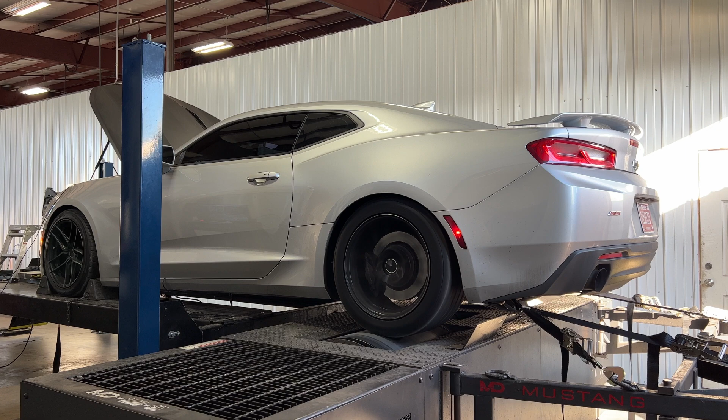So today's video, we're gonna be working on this 2017 Chevrolet Camaro. This one is an LT1 automatic car. This car was just purchased by the owner with everything unknown. So let's go ahead and get it inside and see if we can figure out what all's done to this car.

All right, so let's go ahead and get this hood popped. So just like the other day, we have no idea what's done to this thing. This car was purchased exactly as it sits, and the customer just has some drivability issues. Primarily, they said that it feels like it's loading up at idle.

So we got JLT cold air, MSD intake, KTEC 103 throttle body, got a set of long tube headers. The car's camshaft is unknown. So let's go ahead and pull the file out of it and take a look at it, and then we'll start this thing up and data log it on its current file.

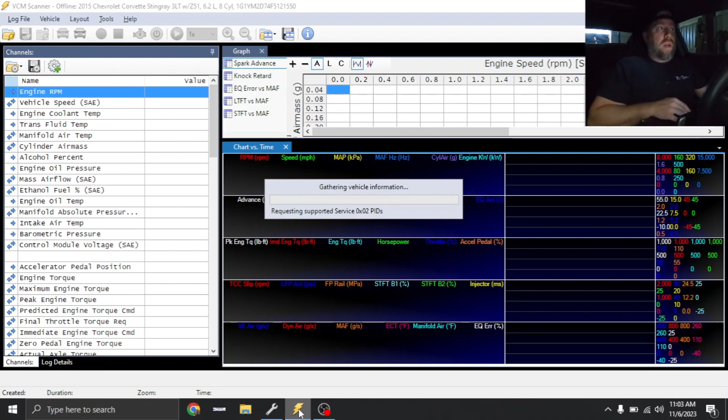All right guys, so just like the other day in the C7 Corvette video, we're gonna start this thing up and data log it and get an idea of where we're at on the current tune. Kind of tough tuning one of these cars without knowing mods. I will tell you that the TCM is still locked. So that in itself is gonna make tuning drivability harder for me. I could maybe utilize driver demand tables to help it some, but without an unlocked TCM, I'm limited in what I can do.

All right, so right off the bat, I'm noticing the VE table has been tuned and it's actually somewhat in the ballpark. Fuel trims actually look pretty good. Zero pedal torque is high, but ignition timing looks good. Manifold absolute pressure looks good. We're idling at 850, 900 RPM. Pulled the car in gear, car actually feels okay. Like it actually feels pretty solid.

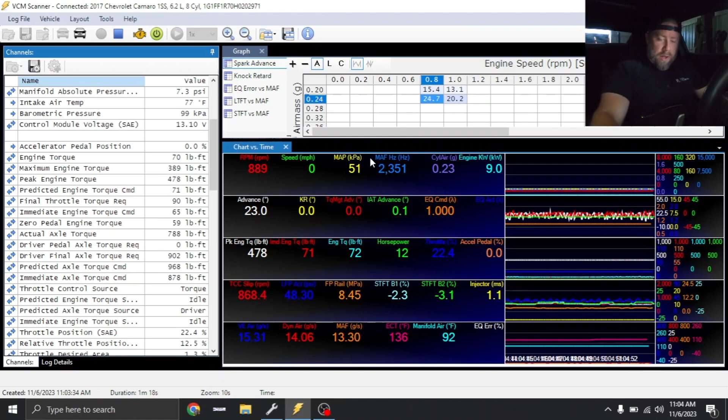So a lot of this stuff actually looks a lot like the C7 Corvette. So I'm gonna look in this tune file real quick. First, let's start off with the VE table. If I haven't mentioned this before, Gen 5 vehicles heavily rely on the VE table to be accurate. So let's pull it up.

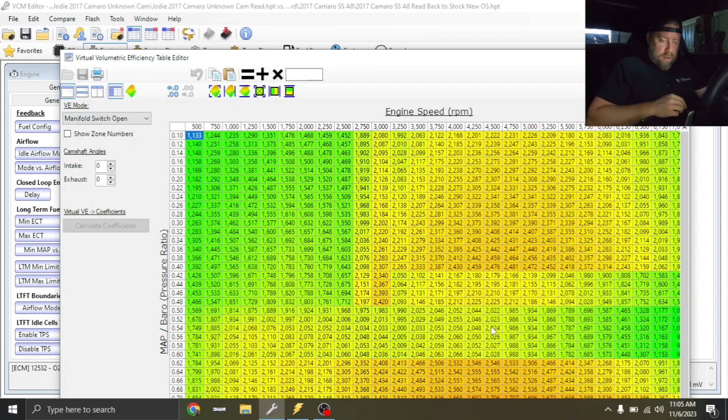Well, right away, kind of seeing a weird anomaly right here, which we're in manifold switch closed, which the vehicle doesn't really reference, but that looks kind of weird. Well, let's go to manifold switch open. Okay. So just right away, looks like we got some weirdness going on here. Make this bigger.

Okay. All right, so that's kind of strange. Obviously, the VE table shouldn't look like that. It's just got this big lack of fuel right here. I don't know. Kind of strange looking VE table. Let's go straight to the torque model.

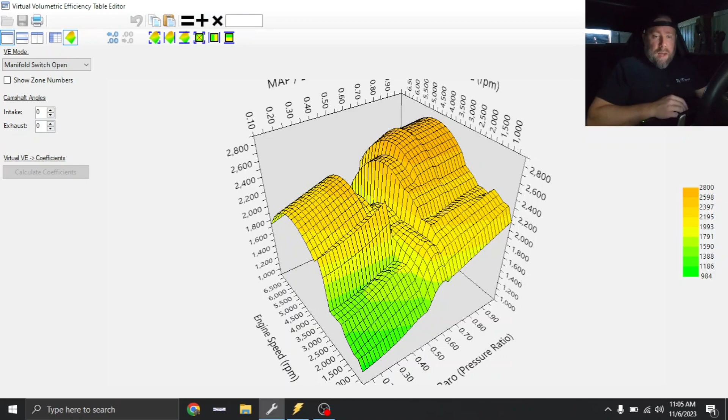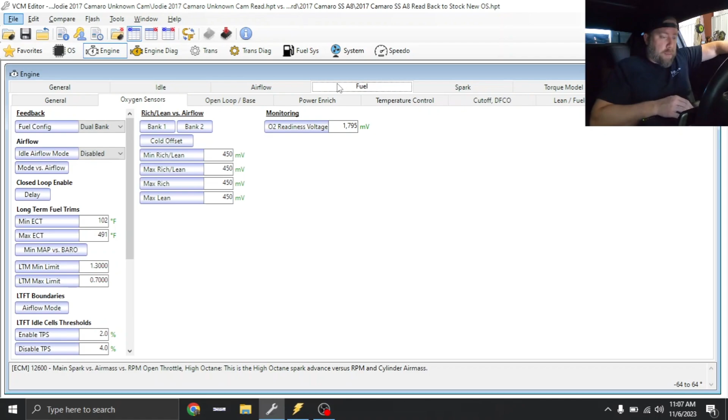Right now, I've got a new operating system for a 2017 in the background. Torque model hasn't been touched. External load has been modified. Okay, so yeah, we got some work to do. All right, I had to go ahead and shut the car off. Car's kind of loud. Windows are obviously pretty dark, but let's keep going.

Let's just pull up the timing table. So it's got all of the timing in the mid-range for sure. It's probably a little excessive. Probably excessive timing pretty much anywhere. Let's see low octane. So low octane is just pretty much pinned at the same amount. So they have, let me get these decimals set up straight. So they have all of the timing in this car right now. So that's not good. I don't think this car has flex fuel.

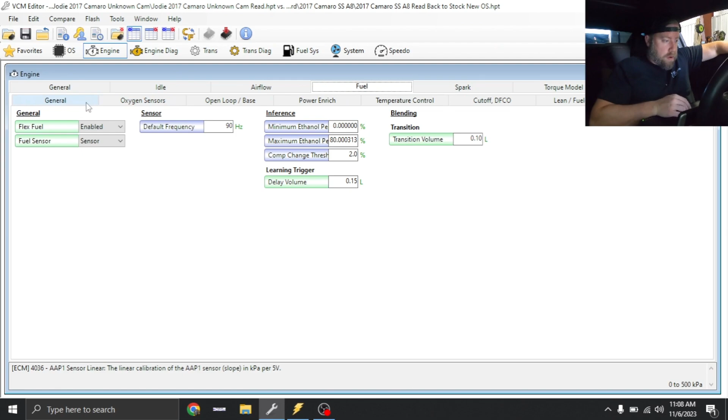Yeah, let's see. Fuel. It's showing a sensor should be on the car. Let me pull up Stoich. I mean, Stoich is set up for flex. Let me get out and see if it's got a flex fuel sensor on this thing. All right, so we do have a flex fuel sensor on the thing. Looks like they're adding 2 degrees for it.

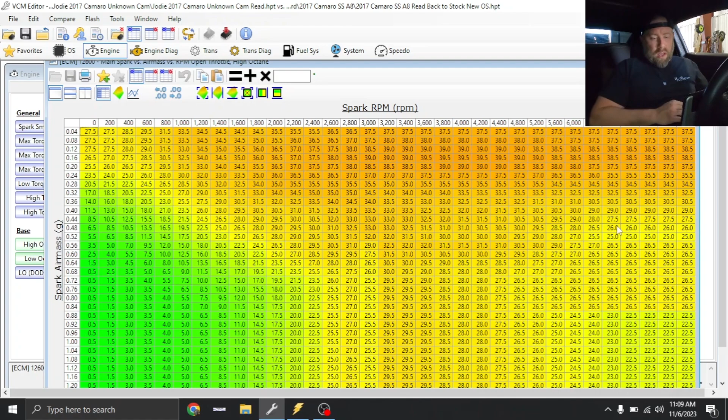So realistically, it looks like the car is just over-timed for pump gas. I mean, timing's probably in the ballpark for E85 though. If you stack the high octane table here with the other, it'd probably make pretty good power on ethanol for sure. But on pump gas, I feel like the car would be pinging its ass off. So we've got some work to do. I wish I had trans control, but that's okay. Let's get the car up on the 4-post and look underneath it.

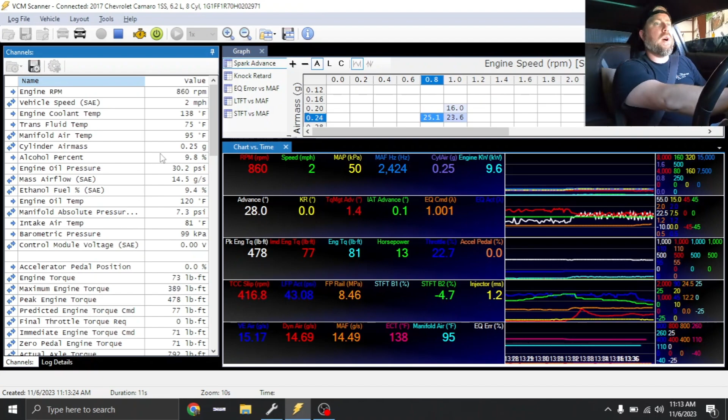All right, guys, change of plan. I want to go drive this car. My concern is, even though I do know that there's stuff in the tune that I can fix, I don't know if I'll be able to 100% cure drivability without having the TCM unlocked. I'm assuming this camshaft's pretty big.

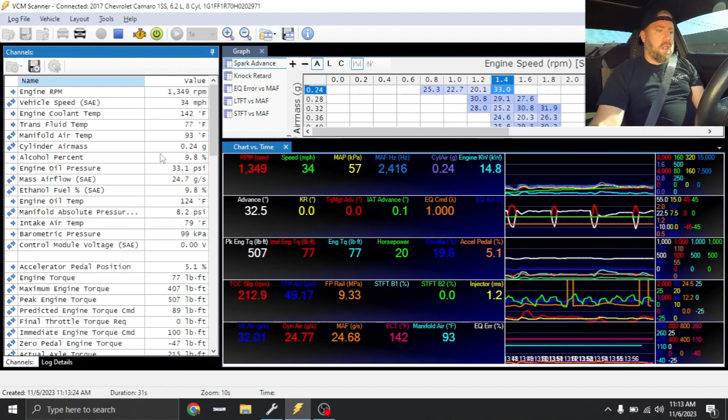Already it feels, doesn't really drive the greatest. The car just feels kind of jerky. I did notice that they made some driver demand changes, which usually on a car without having the TCM unlocked, it actually usually helps it quite a bit.

But this car, I just don't like selling people on a tune if I can't, you know, make the car drive better. So obviously I know that there's some things I can change, and we know that the TCM needs to be unlocked for the car to really drive perfect. But I did notice it's got dealer tags on it, so maybe they're just trying to get it tuned, you know, to make it happy for a customer. But I may not have to sell them on a TCM unlock unless it's going to cause a major drivability issue.

It's really kind of strange to me that somebody would cam it, MSD intake, 103 throttle body, all that stuff, and not do a TCM unlock. Almost makes me wonder if it had an unlocked TCM and they pulled it out and put the stock TCM back in it before they sold it or traded it in. I'm not sure where this car came from.

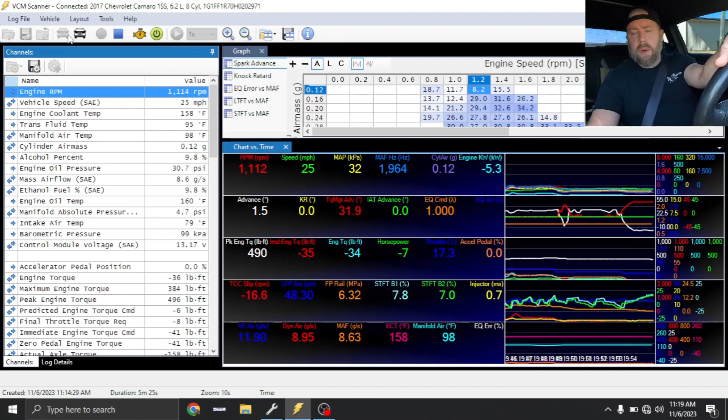All right, so after driving it, basically I can tell that anything below 20 miles an hour, the car doesn't have the greatest drivability. I also looked back through the messages, and it looks like they were complaining about excessive black smoke out the tailpipe. Fuel trims and stuff actually look halfway decent, so I think this is gonna be more based off of detonation. So this car, as you guys saw, is severely over-timed for pump gas. So I think when they're getting down on it, the car's just detonating its ass off, honestly.

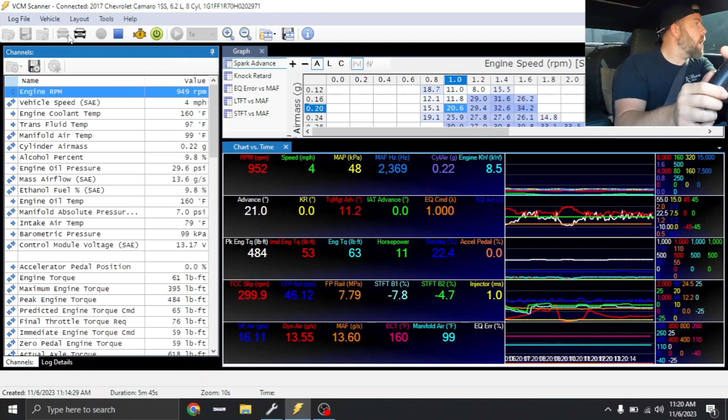So we're gonna go ahead and do a tune on this thing. We're gonna get some timing pulled out of it. We're gonna get the torque model set up correctly. I'm gonna sweep through the MAF, and we will set up the VE table like it's supposed to be. So we can definitely do some improvements on this thing. I just hope that I can completely solve the drivability concerns that the customer had. So I'm gonna try my best, but anyways, I'm gonna go ahead and back this thing up onto the 4-post, and we'll slide underneath it.

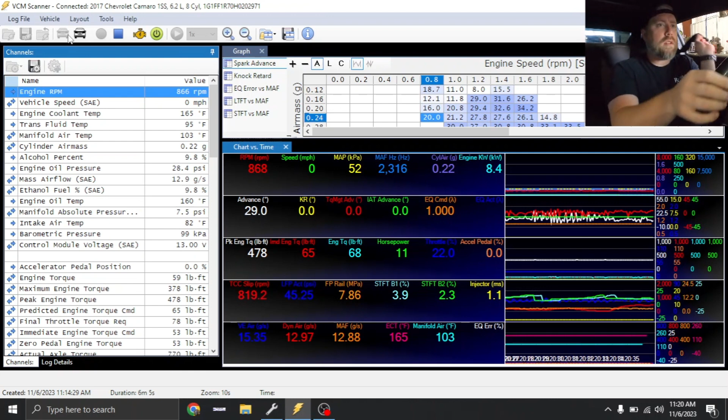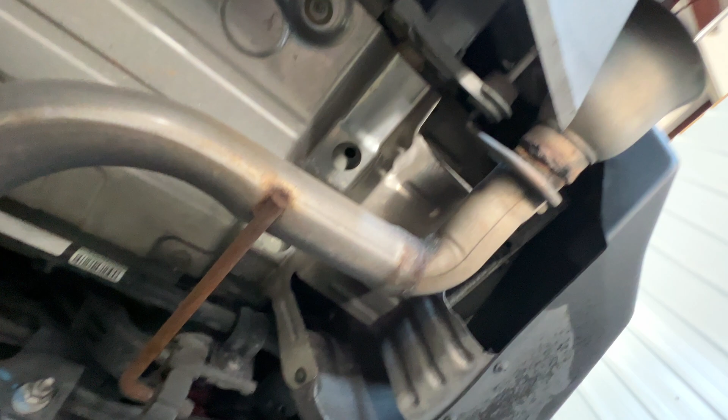All right, so let's go ahead and slide underneath the Camaro. Front tires look good. Stuff looks okay. I don't see any crazy oil leaks or anything like that. Got some headers. So that connects to the factory center part of the exhaust. Still has the DOD flappers in there, not a big deal. And then they straight piped it back here. Kind of small pipe though. I mean, that's like 2.5 at best. So it may have a little bit of a power loss there. So we got some lowering springs. Back tires look good. All right, let's get a wideband in this thing, get it on the dyno.

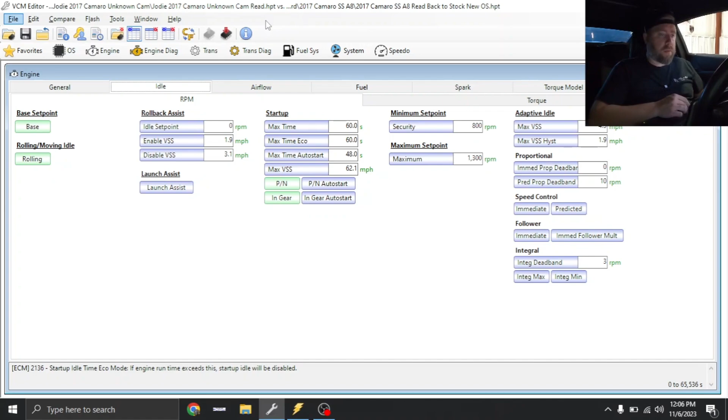So we're gonna go ahead and sweep through all the idle stuff. Gonna make sure the tune is set up for the Katech 103. Gonna put a good VE table in here, or hope to try to guess at a good VE table. So let's go ahead and work on this. So right now I've got a stock read file. This was from a previous car that we had done a fresh operating system on. So I know it's gonna be a good file for a 17A8.

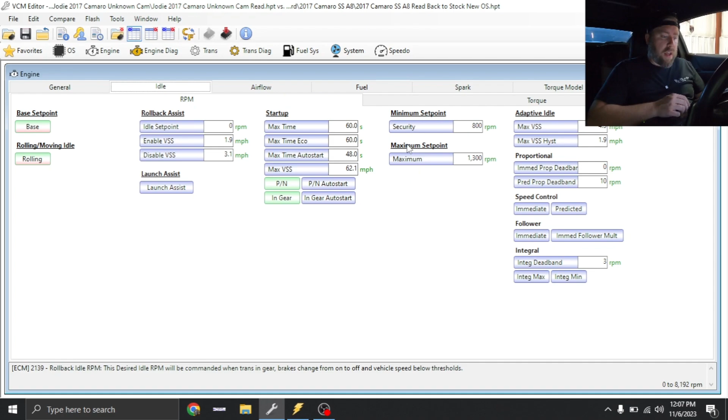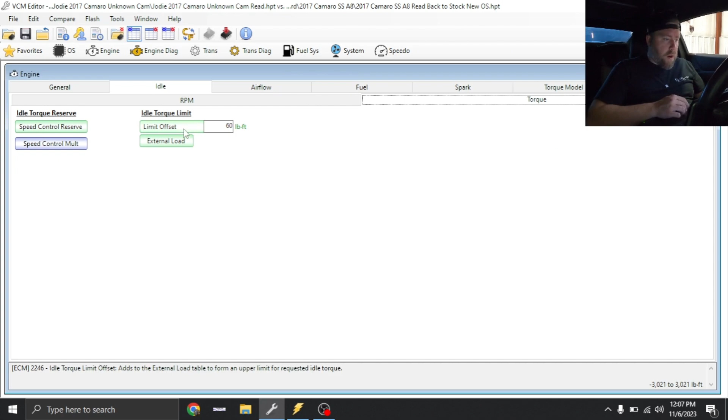So what we're gonna do is I wanna idle this thing down just a little bit. So let's make this 225. Again, I'm comparing it to stock, so it'll be a total of 225 RPM over factory. The same with the rolling idle. Now, because the torque converter is unknown, I'm just going to move this up just 225. And then if it causes me drivability issues as we're rolling, I can lower or raise these numbers however I need to. So park neutral startup, let's make this 225. In gears also going to be 225. All right, so torque, we're going to put this stuff back to stock. And then I'm just going to move up just the axis itself.

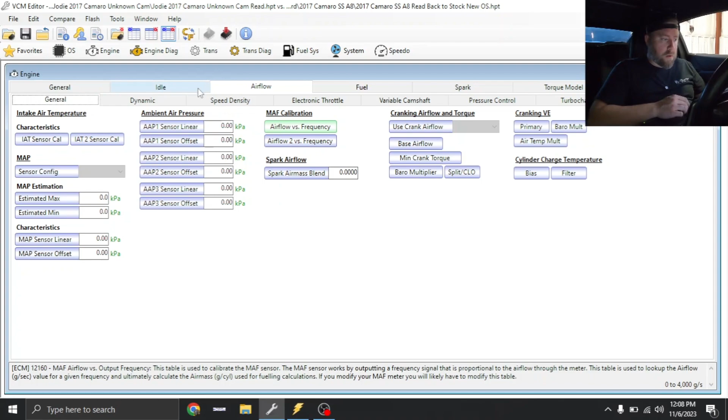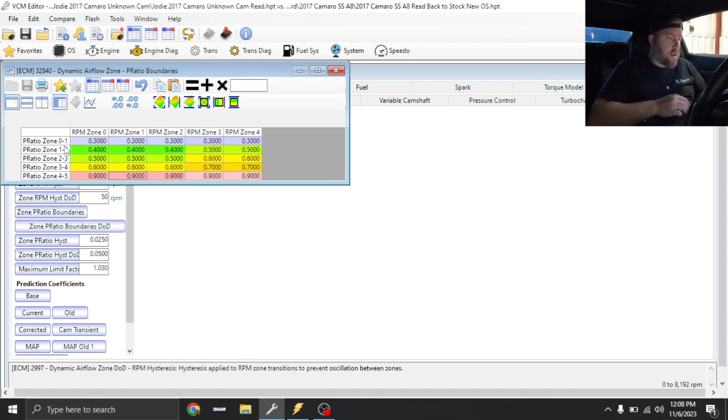All right, so we're going to leave their MAF calibration alone for right now. Dynamic, I'm going to go ahead and change the zone boundaries. That way the VE table comes out looking good. So again, on zone boundaries, what I found for me, you guys can play around with this, is I like making zones 0 through 1 1750, 3 through 4 I like making them 5500, then I interpolate horizontally. P ratio boundaries, I like to just do this as 0.3, and then 0.9, and then interpolate vertically.

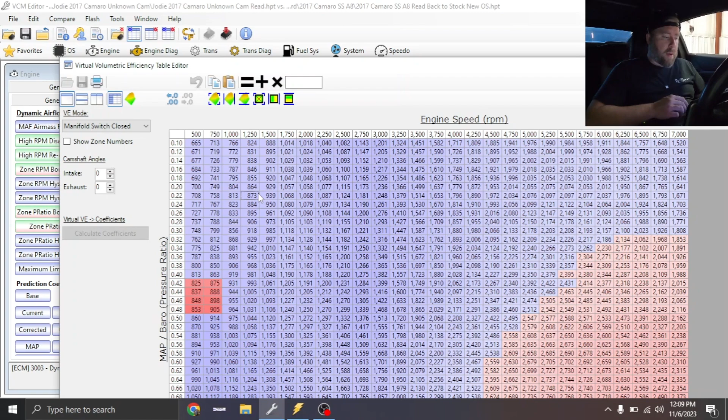And I will do the same thing for DOD. Even though we're not using it, I just like to be uniform in all of my changes. And so while we've got that done, we'll just leave that alone for right now. I'll go ahead and paste in a good VE table. Now again, I'm guessing that this camshaft's reasonable size, so this will be my VE table for right now. We'll have to look and see if it's anywhere in the ballpark. I honestly have no idea if it's going to be in the ballpark or not. But I'm gonna go ahead and copy this to all 4.

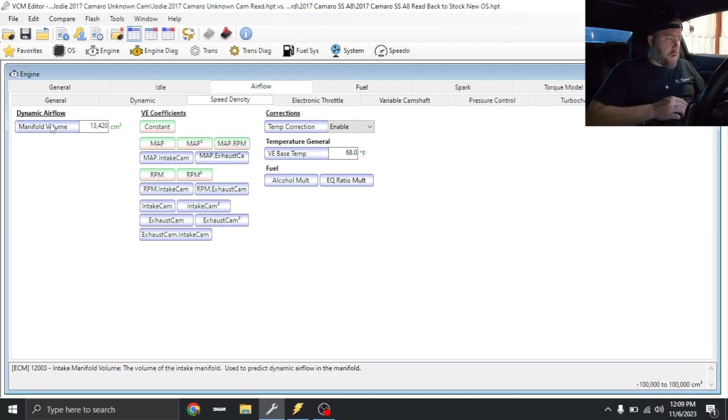All right, so that is good. So speed density has been changed. I do think I have a note on what manifold volume is on the MSD. I'll have to go back and look. Okay, so throttle area limit has not been changed.

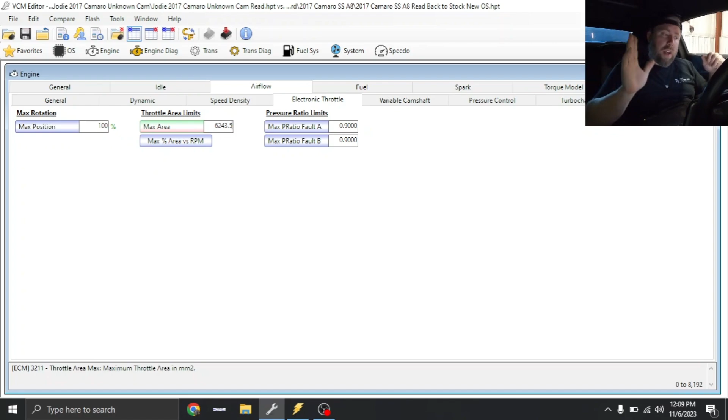So on the KTEC 103s, the number that I've found seems to work pretty good, 6243.5. I came up with that a long time ago just trying to look at CFM, and that's the number I determined. A lot of guys on the forums will say 7200, 7280, whatever. They'll just talk about maxing it out. It's just when I do the math the way I feel like it should be done, this is the number I come up with, and every car I've tuned, this seems to work good. So I'm gonna leave it just like that.

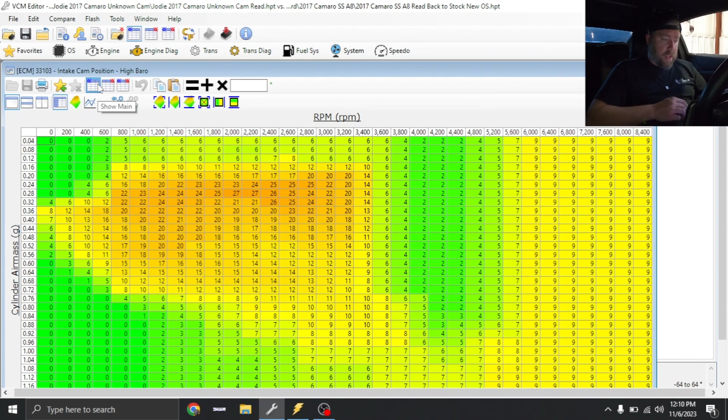Variable camshaft. So they're showing this camshaft would have a lot of retard in it. So I don't know what cam this thing has. I mean, unless they just locked it out and just disabled the code. I don't know. We're going to have to datalog the camshaft. I'm going to leave the camshaft stuff alone. I honestly doubt this is correct, but we'll check it.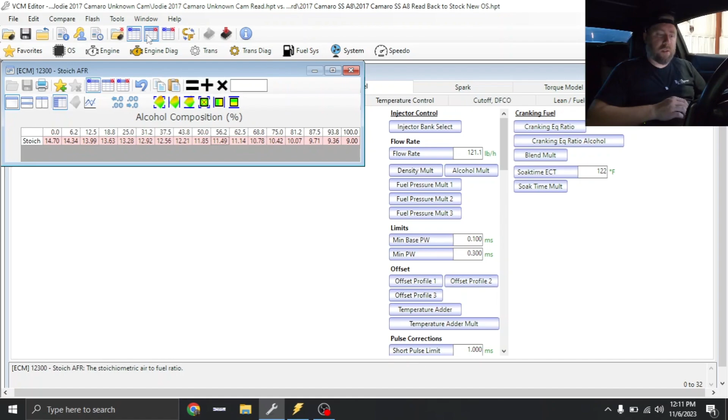This car, it does have flex fuel on there. Again, I always change this because this is what the actual stoich point is. GM is 2/100ths richer on the stoich point. I don't know why. I just like to use numbers that I know for a fact are good. Let's see, SOI has been changed. Let's see where they've changed it. So they've changed it up top, and they reduced it. So that looks promising. Man, after seeing those numbers, I almost know who tuned this thing last. I went ahead and disabled long-term fuel trims.

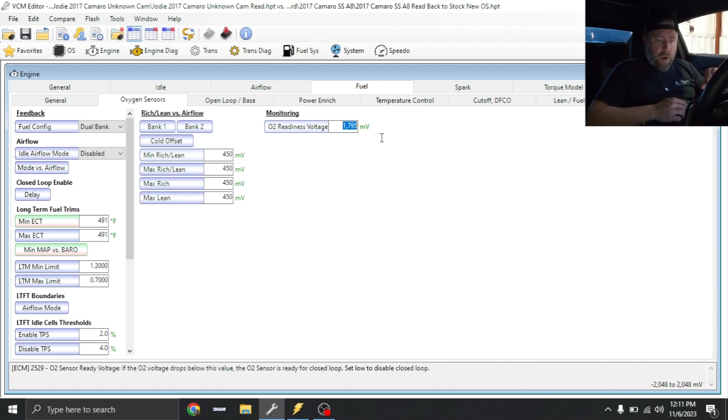All right, we're going to put this thing into open loop. So to do that, you just go to this O2 readiness voltage and just type in a super low number. So I'll do negative 2048 because that's what it shows me to do right here. And I'll go ahead and make this a really high number. This part right here shouldn't be necessary, but I have had some operating systems where it was actually necessary to make that change.

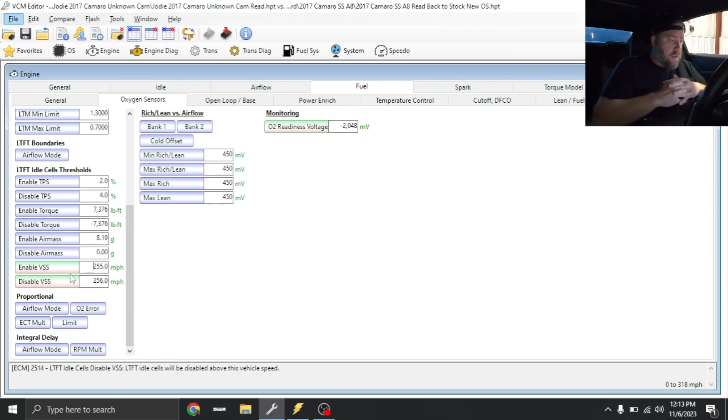One thing that I will show you guys, so if the car has headers, I have actually noticed that cruising down the road, if this right here is left alone, if you let off the throttle, a lot of times it'll go like plus 37 on fuel trims and it'll actually go super rich. So I'm going to make this enable 255, make the disable 256. Moving this up to where the speed is not attainable, I've noticed that it's helped to eliminate the false positive fuel trims on decel. I've tried messing around with the torque coefficients on deceleration fuel cutoff, and it seems to help sometimes, but that right there seems to be the fix.

So anyway, we're going to move through all this stuff. Well, the enrichment ramp in and out, this setting, when y'all set these up this high, all it does is produce a shitload of black smoke. There is zero performance benefit. If y'all are doing it and you want to stick with it, go right on ahead. I will tell you that I have found no instances where this actually helped, except for on forced induction like Roots blower cars.

This right here, what I've noticed, causes black smoke. So when you're laying into it, you get that massive cloud of black smoke. We don't need to be doing that. So again, you do you. I'm putting these back to stock. I have noticed zero negative effects keeping these stock.

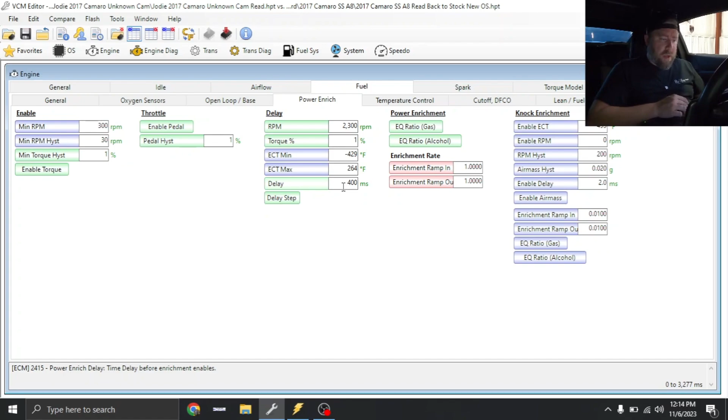Otherwise, for right now, I'm going to leave everything else alone, except they added a delay. Wait, so they added a power enrichment delay. So they added a 400 millisecond delay, and then they turned up enrichment rate. I don't know. There's more than one way to skin a cat. I could just try to keep doing it the way that GM does it.

So I'm putting this back to stock. I'm just going to go ahead and put all this stuff back to stock, except for torque. Like I've told you guys before, I like to do a TPS-based power enrichment. It's personal preference. I just like it. All right, let's load this tune file in and see how it does.

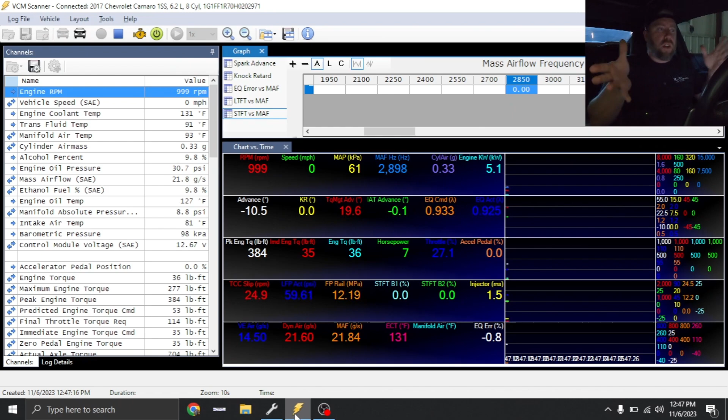All right, so that tune file is loaded in. I went ahead and changed a couple other things, basically putting in a good timing table, since obviously you guys saw that timing table was ridiculous for pump gas. If you're going to run ethanol, you need to have a good solid pump gas table and a good solid ethanol table. You don't need to have a table that the car basically needs ethanol to run correctly on. That's not what we need.

All right, so right now letting the car warm up. I think I missed the mark on the VE table just a little bit. This thing's probably going to end up taking the same or a similar VE table to what that wrapped Corvette did. Otherwise, so far everything's looking good. Torque model is stock, so I wanted to get an idea where we're at zero pedal engine torque-wise. It's crazy, almost everything's lining up to what that wrapped Corvette had. That wrapped Corvette was off like 30 foot-pounds also at zero pedal torque.

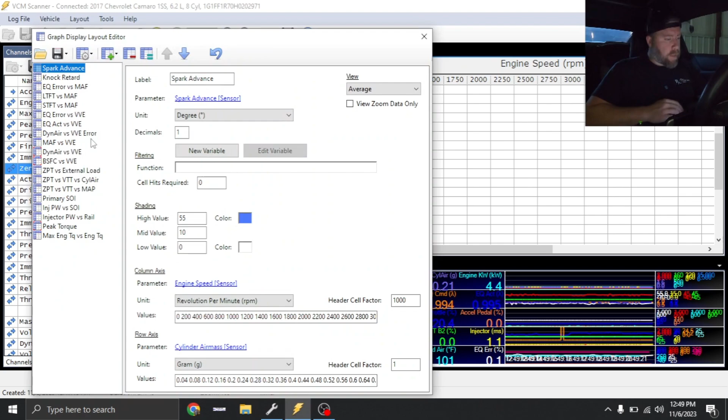All right, well, I'm gonna go ahead and make a torque model adjustment. If you need a reference to what I do on the torque model stuff, I'll link the video to the wrapped Corvette here. It's essentially my last video. So I'm gonna make an adjustment so that you guys can see how far off I am on the VE table. So basically I went from one extreme to the other. So I'm gonna go ahead and make these changes.

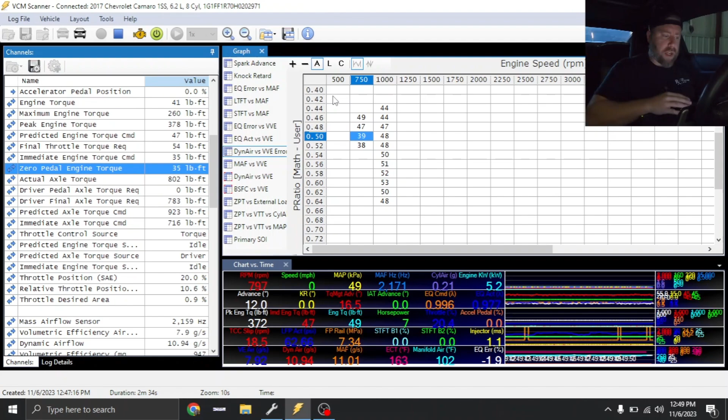This calculation is huge when it comes to getting one of these dialed in quickly. So anyways, I'm gonna make a change and I'll be right back. All right, so VE table adjustment's been made. The MAF curve is still the same curve that was in the car in the original tune. It seemed like it was pretty spot on so far, at least as far as part throttle stuff goes. Zero pedal torque, I just did the 15% like what we did on the wrapped Corvette, and we're pretty much 0 to 6 foot-pounds, so that's looking good.

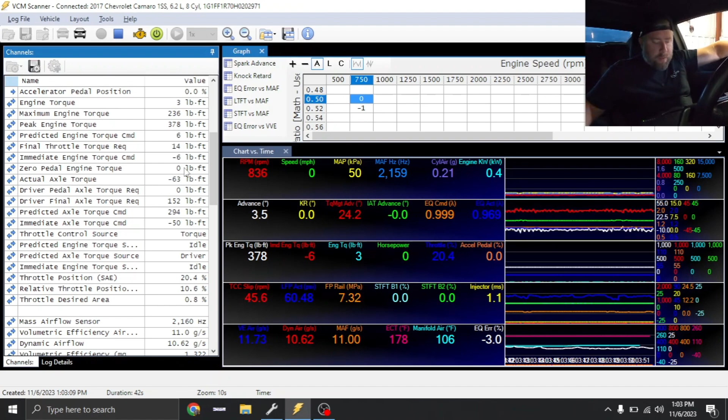So everything's looking good. I'm gonna get the dyno into vehicle simulation mode, and we will start driving it, and I'll start doing some rips. All right, so dyno is set up in vehicle simulation mode. Let's drive this car and see what the MAF curve looks like. Obviously since I tune these cars so much, I've got a timing table in here that should be pretty close regardless of what camshaft it is. As long as heads aren't milled or something like that, we should be good.

So far, MAF curve's looking pretty good. My VE table's a little bit off, nothing crazy. Obviously with an unknown cam, I basically have to start from scratch again. All right, I'm gonna go ahead and do a 4th gear rip. It's probably gonna spin if I had to guess, just because of me being in 4th gear and these tires look so-so. But anyways, let's go ahead and do a little partial rip.

Definitely spun. Car's a little bit rich. Nothing crazy though. See where I lifted off the throttle just a little bit. Or actually I didn't. Accelerator pedal still, I could have sworn I lifted. Guess I didn't though. But anyways, car looked a little smoky out the back. It was a little bit rich.

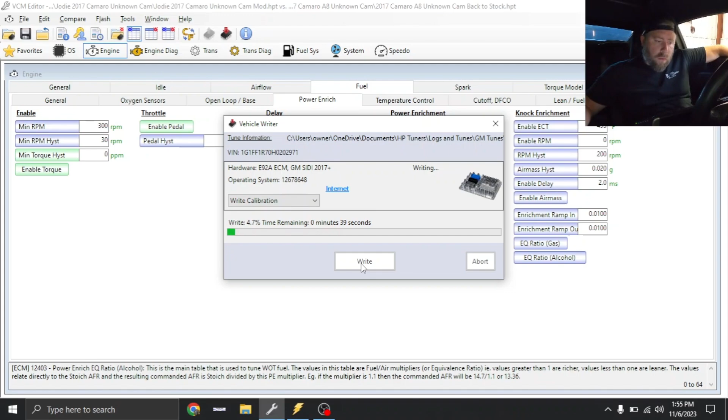All right, so just spoke with the customer and he's just gonna run on 93. So I'm gonna go ahead and disable the flex fuel sensor and make sure that's squared away. So I adjusted the stoich to 14.10 to account for the roughly 9 or 10% ethanol, and disabled the sensor. And we'll do another pull and see how the MAF curve looks now.

So it could be that the smoke and the rich condition could have just been from where the car was trying to go over to 100% ethanol. So we will see. So disabling that, writing the tune in, and we're gonna try again.

All right, tune file is loaded in. Flex fuel sensor has been disabled. So we're showing 0% ethanol fuel here now, which is correct for it being disabled. And I have the stoich point set to 14.1, just like it would be from the factory without a flex fuel setup. So tires hopefully should still be warm. So we're gonna go ahead and do another rip to see how fueling looks up top now.

So it's still a little bit rich, but nothing near as bad as what it was. And you guys can see timing has definitely come back down. Manifold air temp is somewhat low, so I think this is a spot where the manifold air temp table is adding a little bit of timing. So this may work out good for this car, but honestly, this is probably going to be too much timing if I had to guess.

Well, I'm going to go ahead and make some adjustments to the MAF curve. I'm probably going to pull a little bit of ignition timing off the car, and we should be about ready to do some actual dyno pulls where we're actually reading power numbers.

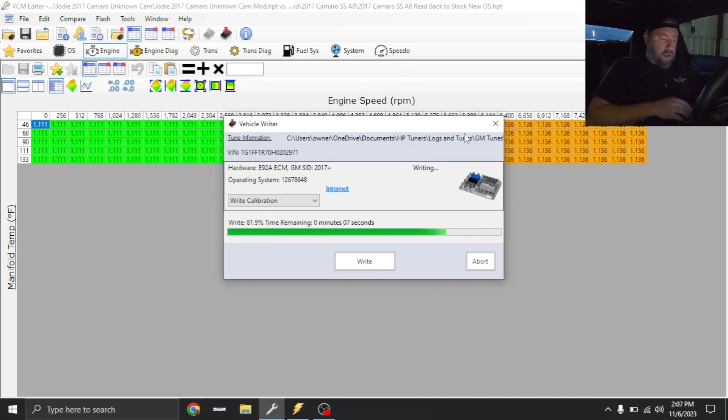I'm not real sure. But either way, I can't show you right now, but where you guys saw earlier where it was commanding 8-10 degrees or something like that up top, I'm gonna assume that that is incorrect. We're just gonna keep doing rips.

All right, tune file's loaded in. I just made that little change to the MAF curve. We're gonna do a dyno pull from 3,000 to 6,600 as long as everything looks good. I'm also gonna log the cam angle. As you guys saw, I saw in the data log that the cam was going up to like 4.5 degrees or so. Obviously they're commanding more than that.

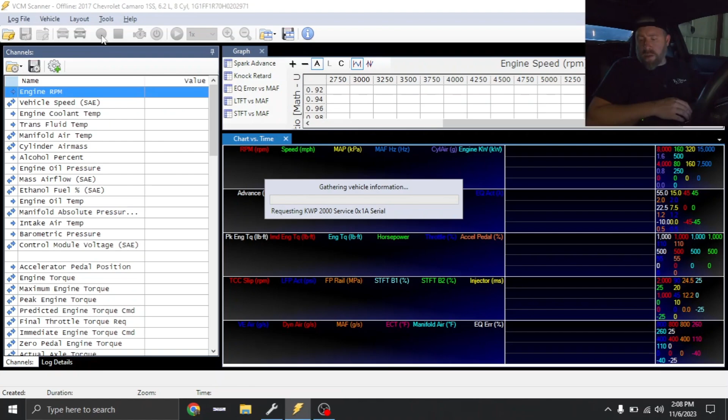So I want to watch the desired angle versus error, and we may end up zeroing out VVT and then sweeping through by moving cam angle to figure out what this camshaft, whatever it is, likes on VVT. So let's go ahead and get this thing up into 5th. So I do 5th gear pulls, wide open throttle.

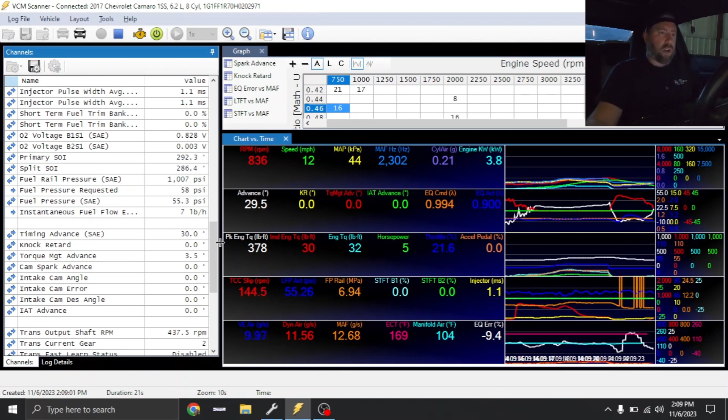Hang on, this transmission's acting like it doesn't want to go into manual mode. Shifter feels funny too. All right, I'm gonna shut the car off and stop the data logger. I need the shifter to work right. It was working just fine just a second ago. I knew the shifter felt kind of funny, but it was working. There it goes. CTS-Vs used to do that. I don't know what's up with this thing yet.

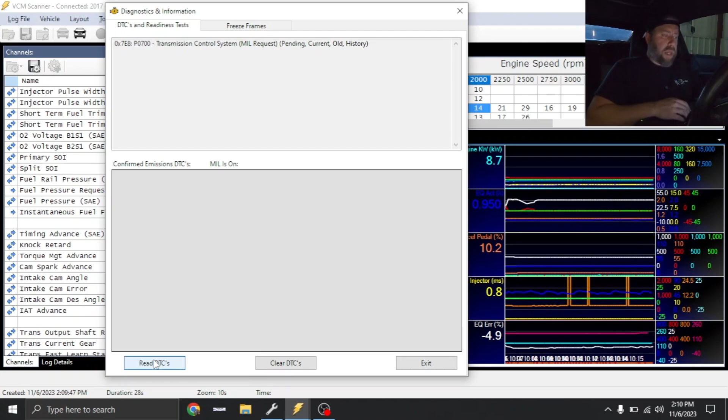Check engine light just came on. P0700. Great. Okay. Maybe that's in the shifter. Either way, let's do a rip. Dyno slowing down. Car's really smoky on decel. Like, really smoky. Air fuel ratio looks pretty decent.

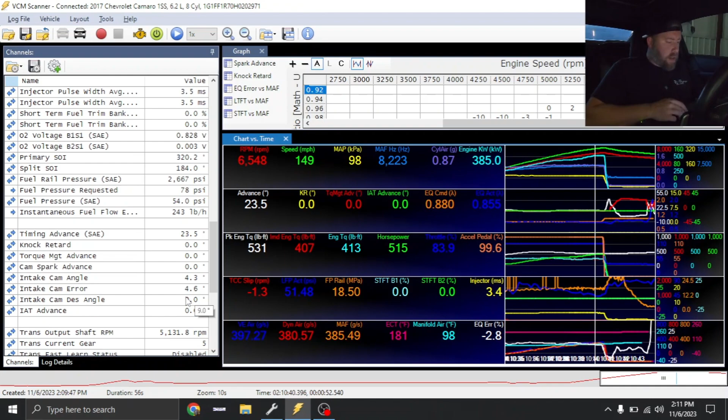So you can see our cam error, so where they were commanding 9 degrees and the most it's getting is like 4.5. Yeah, I'm just gonna go on and say I bet this thing's got a 4-degree limiter in there. So we're just gonna tune this camshaft like it's got a 4-degree limiter in it. But let's get out and see what kind of power it made.

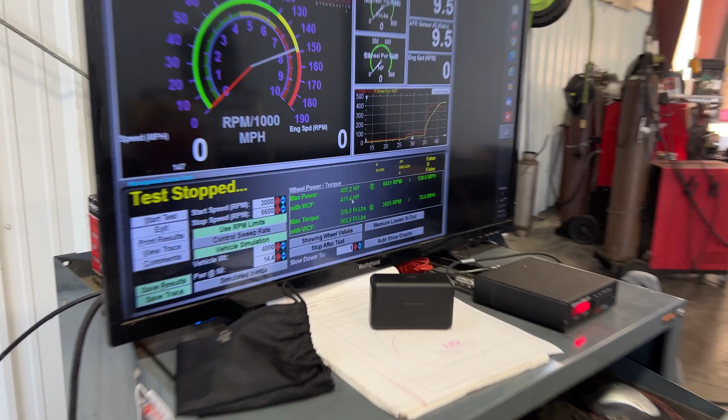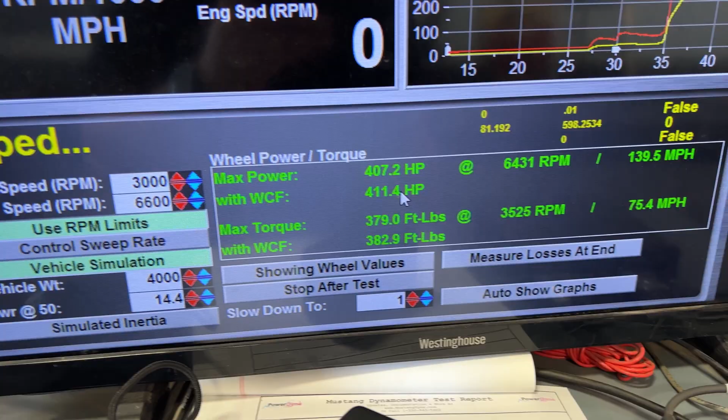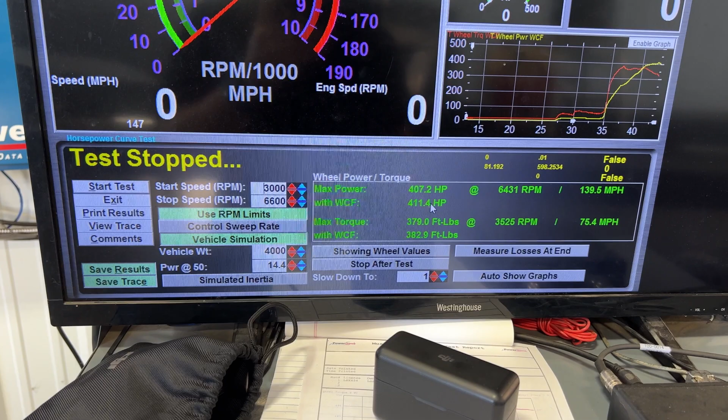All right, so power, kind of low. 411 horsepower, 382.9 foot-pounds of torque. So on a Dynojet, that'd work out to roughly 450, 460, which is honestly not good at all. So again, we do have 2.5-inch exhaust at the very back where they did the muffler delete, so that could hurt us some. But what I'm gonna do, let's zero out variable cam timing and do a pull with no cam retard, and then sweep our way up.

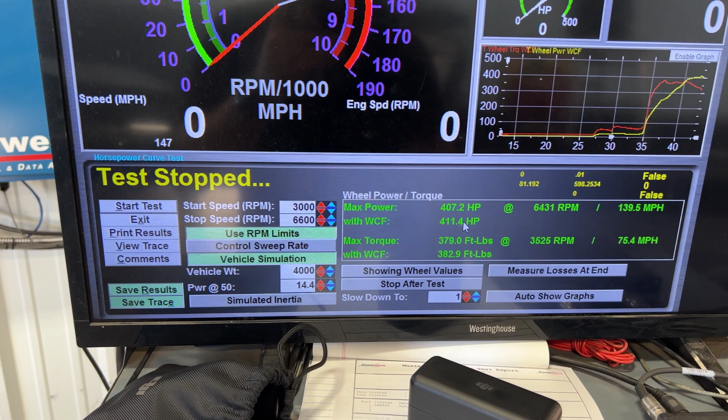So we obviously only have 4 degrees of movement, but without knowing what camshaft's in here, we're just kind of shooting in the dark. So we're just gonna start from scratch. Only change I made is a very small fuel adjustment to the MAF, and I zeroed out the variable cam timing table. So this should be a fresh start. So theoretically the power should go down, and then we should need to put more cam timing retard in it to actually make it happy. All right, let's do a rip.

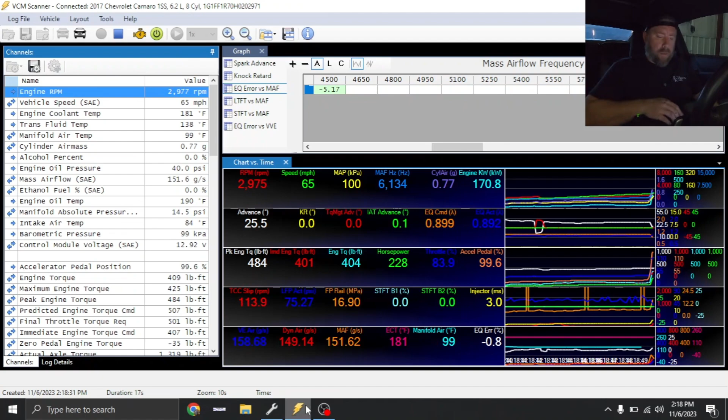Fueling looks pretty good. This car is loud. The fueling looks pretty good. I mean, it's pretty much dead nuts on. You guys can see my active EQ error. It's pretty solid. So let's get out and see what kind of power.

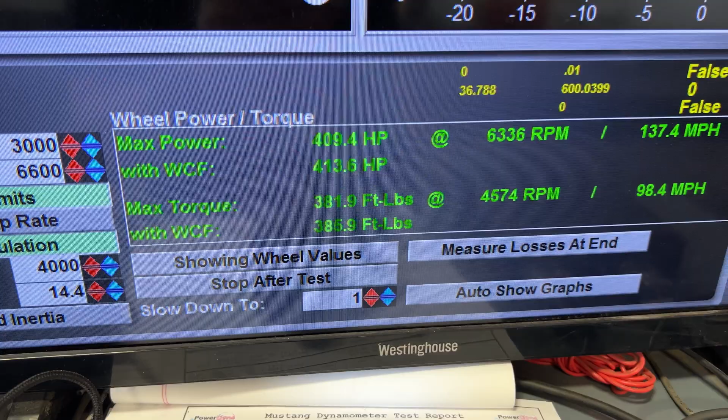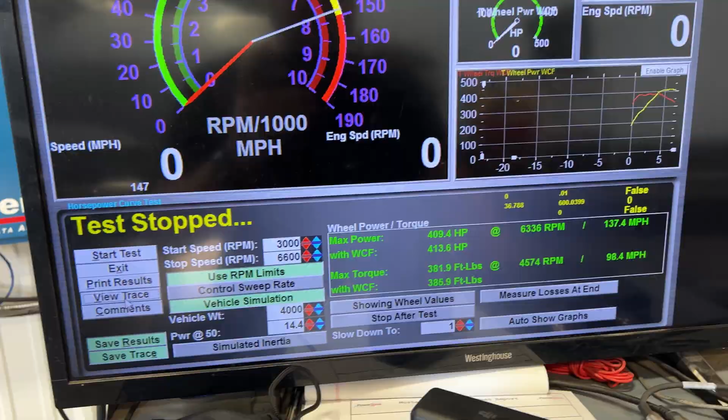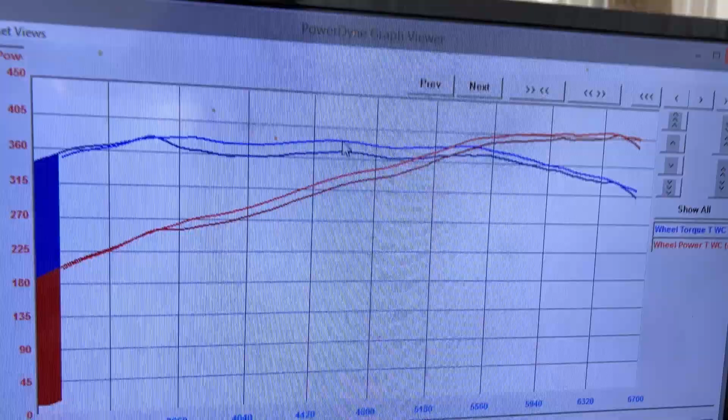All right, so that pull made 413.6 horsepower, 385.9 foot-pounds of torque. So as of right now, peak number did actually jump up a couple, even just by zeroing out variable cam timing. So let's look at the trace. All right, so here's the trace. The lighter red and the lighter blue is the pull that we just made. So again, we just moved the camshaft to 0. So it's basically like it's locked out.

So like right here, 371 foot-pounds of torque to 386 foot-pounds of torque. So you're talking like a 15 foot-pound torque gain. That's crazy. Now it tightens up top, but pretty much everywhere, the car makes more power with the camshaft at 0, which is kind of strange, but again, that's why we test.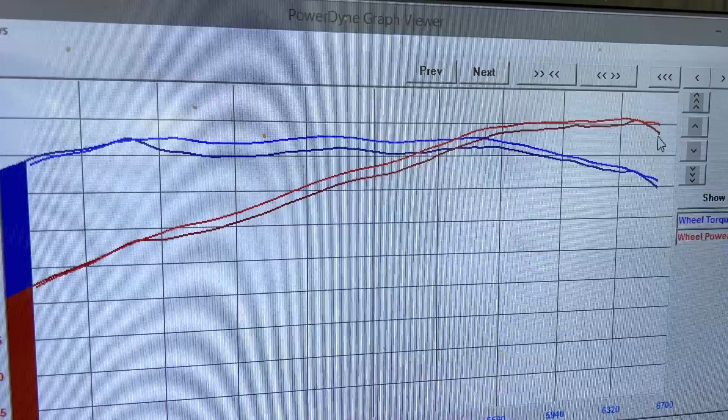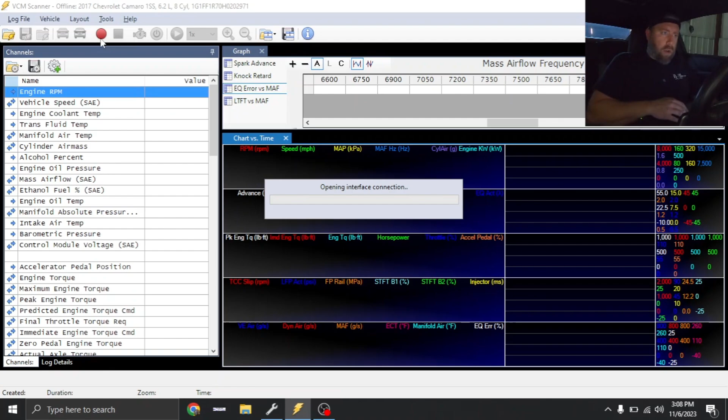All right, going over the tune, looking at the rail pressure, it's looking like this thing has a 32% fuel lobe. So I made that adjustment, made an injection timing change again, keeping ignition timing low. This thing does not seem to give a shit about ignition timing, which is totally cool with me. Tailpipes are looking clean now. So we're down to like 21 degrees up top, which on the smaller camshafts is usually what they want.

So I just really expected this thing to have a bigger camshaft than what it is. If I had to guess, I'd almost think it's one of the earlier Texas Speed VVT cams that really didn't seem to work that good. I mean, it seems to work good as far as drivability and manifold vacuum and stuff like that, but power-wise, this camshaft just isn't doing what the modern LT cams do, that's for sure.

Anyways, dyno is set up again. Like I said, this should be the final pull. We'll see. As long as everything looks okay on this data log, then I'll take it out on the street and finish it up.

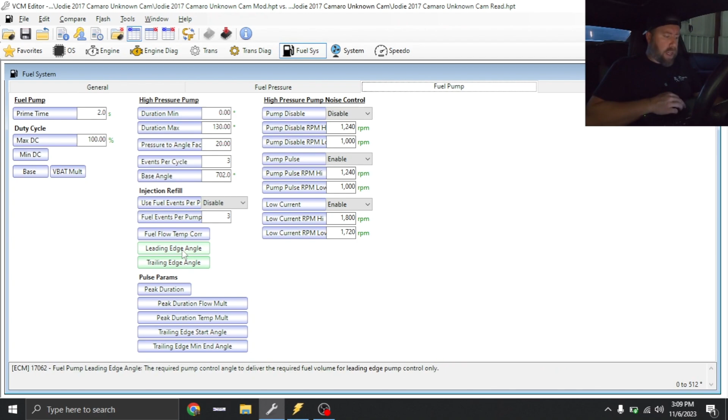Yeah, as far as data goes, everything looks good. We're not getting excessive rail pressure up top anymore. Definitely a 32% lobe, so I made the adjustment to the tune. If you guys aren't sure what to do whenever you're doing a fuel lobe, I believe I showed you another video, but basically what you do is you go under fuel system, fuel pump, and then this leading edge angle, and then whatever size the fuel lobe is, you'll just multiply this.

So I multiplied this whole thing by 1.32, and now the rail pressure looks like it's actually holding up top like it's supposed to. So anyways, let's get out and see if it's made a power change at all. This thing's kind of been in the 407 to 412 wheel horsepower range for probably the last 4 or 5 dyno pulls now. So I doubt we're going to see a change.

I'm just trying to make sure that the data looks good, and right here everything looks clean. I mean, we've pretty much nailed wide open throttle fueling. Yeah, so everything looks good on my end. So let's double check it on the dyno. All right, this is probably the final pull. I've swept through variable cam timing. I've moved air fuel ratio around. I've moved timing around. Honestly, I think it just comes down to this is just a small camshaft.

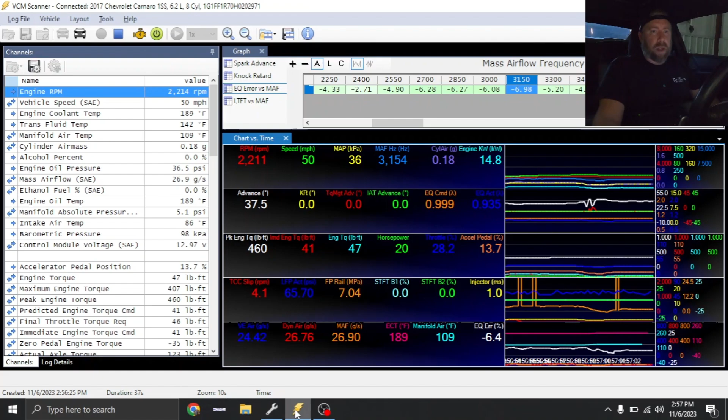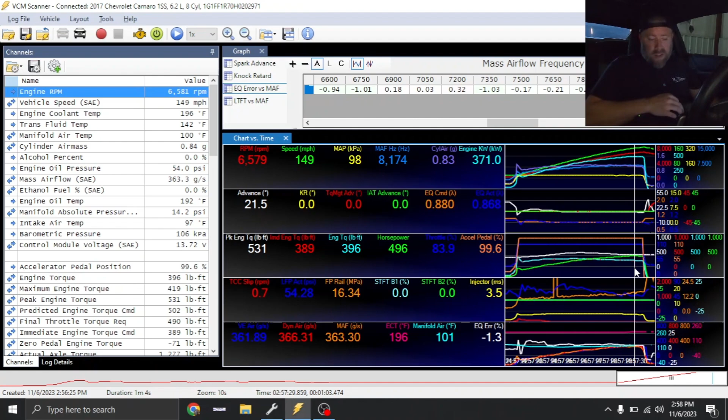All right, look at the data log. Everything looks clean. You'll see I'm down to 21.5 degrees of timing. That seems to be about what this thing wants, from the look of the tailpipe and from the look of everything else. So whatever power it makes is what it makes, because according to this data log and what I've seen coming out the tailpipe, this car is actually happy now. So anyways, let's get out and see what kind of power it made.

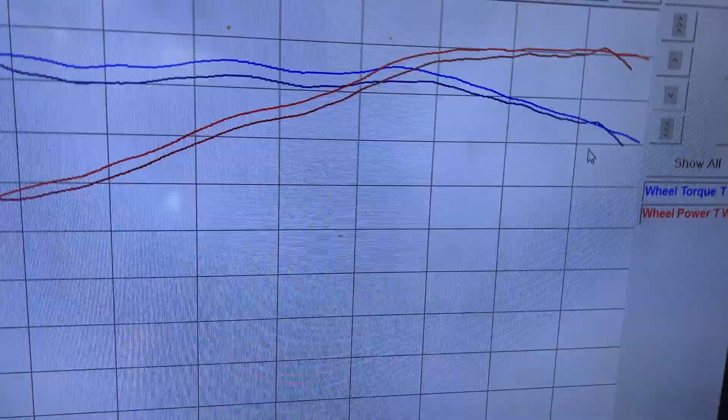All right, so this is the final run compared to the first run. You'll see we're actually holding power out longer, and this is with a lot less ignition timing. We're making power pretty much everywhere. One thing I want you guys to understand is this is also with like 4 or 5 degrees less ignition timing. I tried to use a couple more degrees and the car really didn't give a shit. Like I said, the car has been pretty much within 4 or 5 horsepower the entire day.

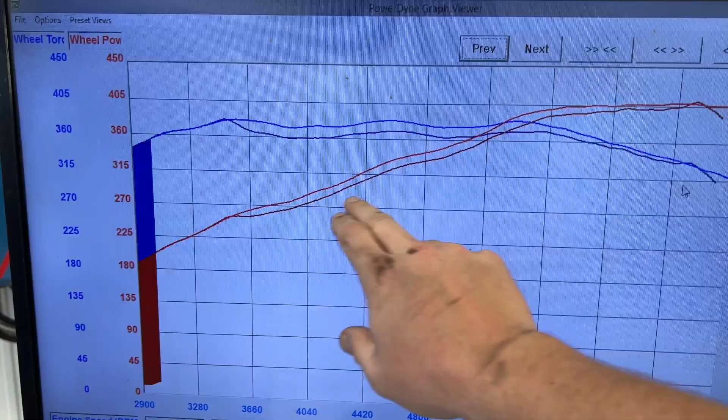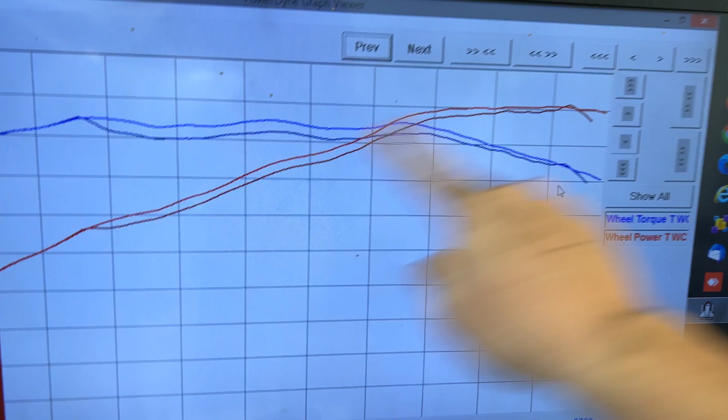This lower line right here is with the cam timing that they had, and you'll see where it dropped off like a rock up here. And this is basically with just the cam zeroed out. I tried retarding it 2 degrees. I tried retarding it 4 degrees. And the 0 degree line is actually best everywhere across the curve. I found no spot where it was better with any type of cam retard.

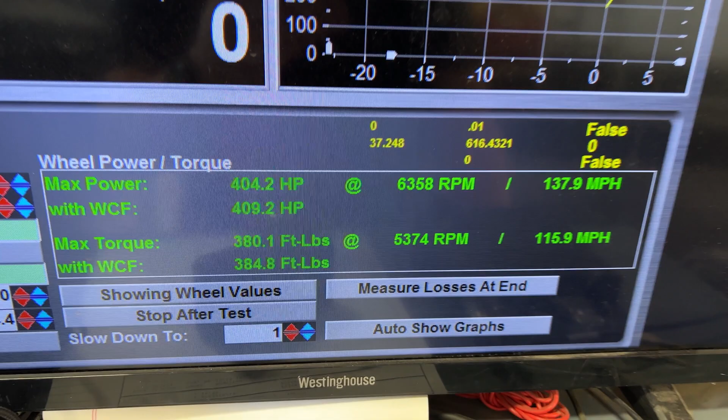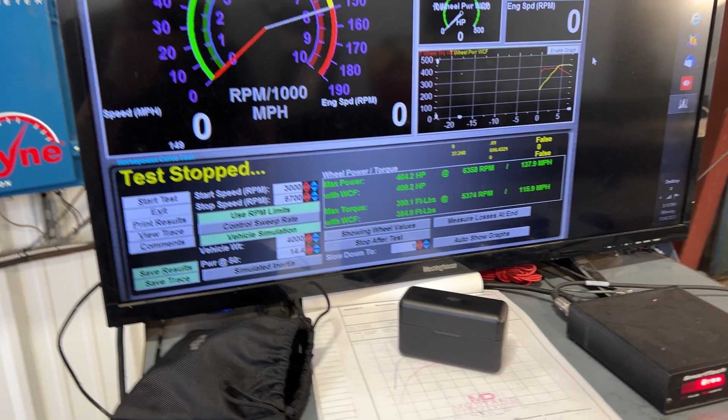So anyways, that last pull, 409.2 horsepower, 384.8 foot-pounds of torque. So again, it's not necessarily like it's down on power, it just doesn't make a lot of power. I would have assumed with that JLT intake and the 103 K-Tech and the MSD that this thing would have had a bigger camshaft in there, but it's just not working out that way.

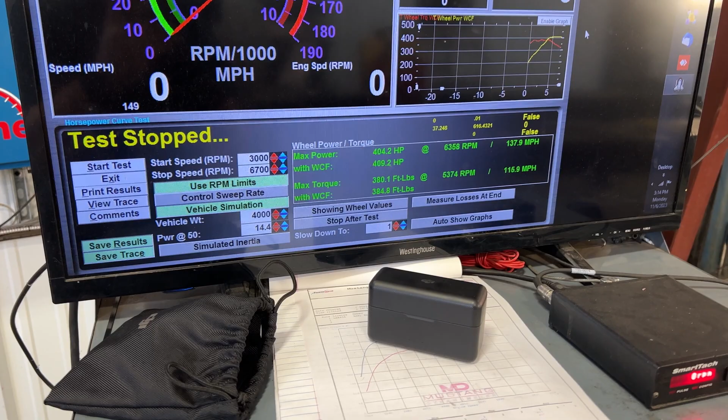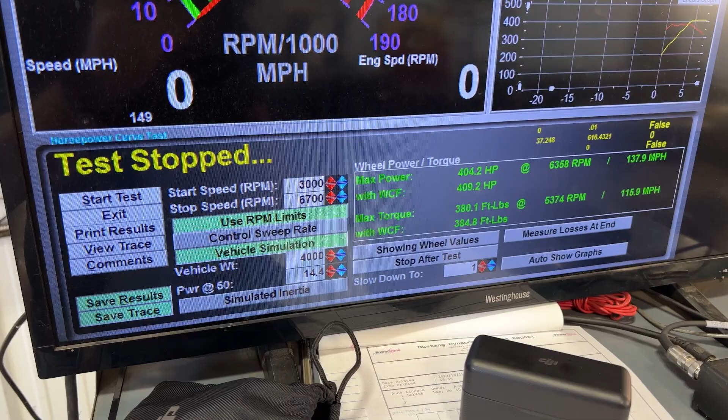So again, I think this is just going to end up being one of the older Texas Speed style camshafts or something similar, where the LT technology just wasn't there yet. Because I don't know if you guys remember the blue Silverado. It had the 225 cam on there, and it made like 20 or 30 more horsepower than this thing. So yeah, I just think it's just too small of a camshaft.